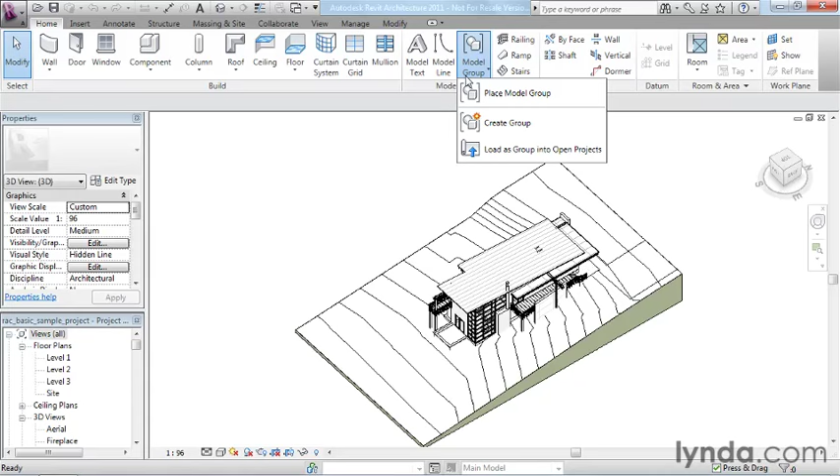The next kind of button we have is called the drop-down button. So over here on the model panel, we have our model group button, and if we click on that, it actually expands to reveal a small menu. So these are drop-down buttons, and beneath that menu we'll have several different options.

The third kind of button actually combines the previous two. So if we look at our wall tool as a good example, we'll see that the top half of the button actually is just like the door or the window tool, where you simply click on it and you'd get that function. The bottom half is a drop-down button and reveals several other wall-related tools.

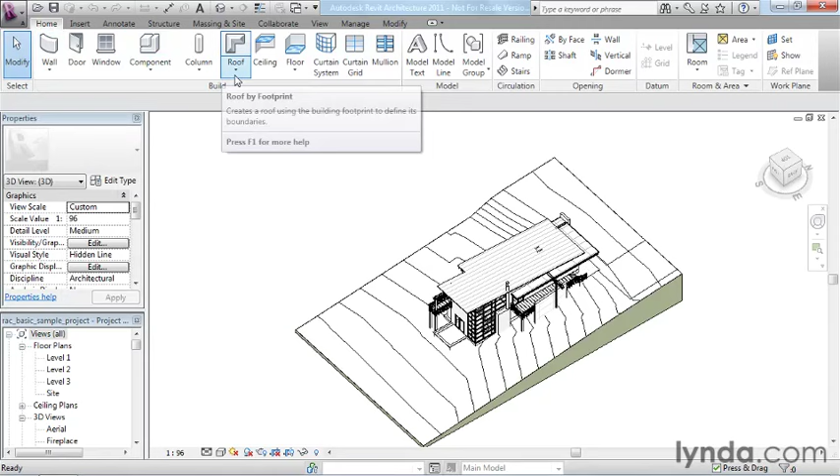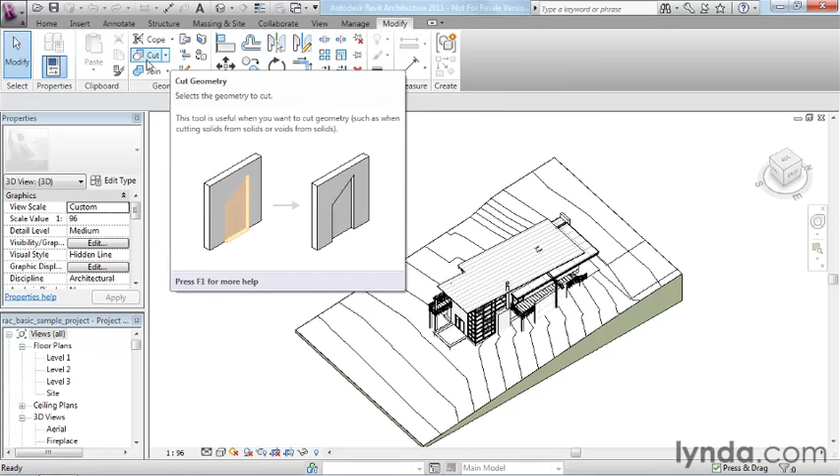You can see that across the ribbon here, there are actually several examples of the split button available to us. Most of the ones we see here on this screen are organized vertically, where we're split with the default at the top and the drop-down at the bottom. If I go over here to the modify tab, in some cases you will find a horizontally oriented split button. In this case, the default command, cut, would appear on the left, and on the right we would have our small drop-down, which reveals a few choices.

Let's look at one other aspect of the ribbon. If I click over here to the Annotate tab, we can see two unique ribbon functions: the expandable ribbon panel and the dialog launcher. Let's take a look at the expandable panel first. It highlights when you put your mouse over it, and when you click on the small drop-down arrow, it reveals a variety of hidden buttons that were maybe not as frequently used, so they're sort of stashed away under this little expanded panel.

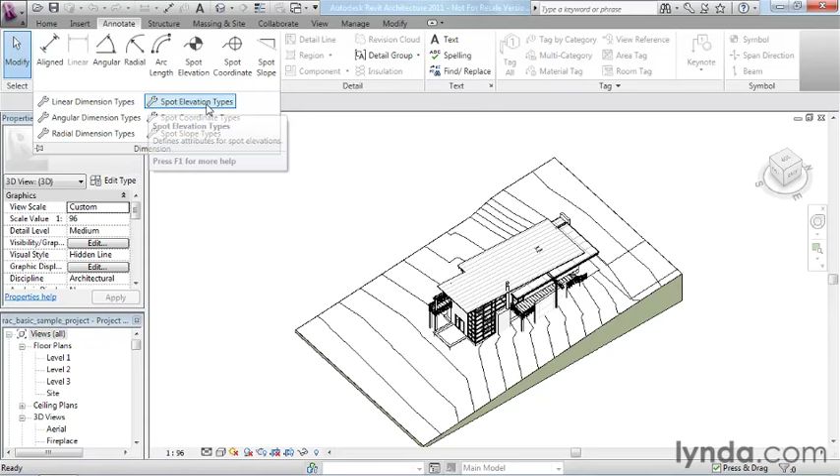But otherwise, each of these buttons functions the same as any of the others would. The dialog launcher is just another form of button. It's basically a push button, but it appears right on the panel itself, and it usually has something to do with that panel's topic. In this case, the panel was a text panel, and when I click the dialog launcher, it actually launches the text properties window. In this window, we could go ahead and make any changes we wanted to the properties of text. So I'm going to go ahead and cancel out of there.

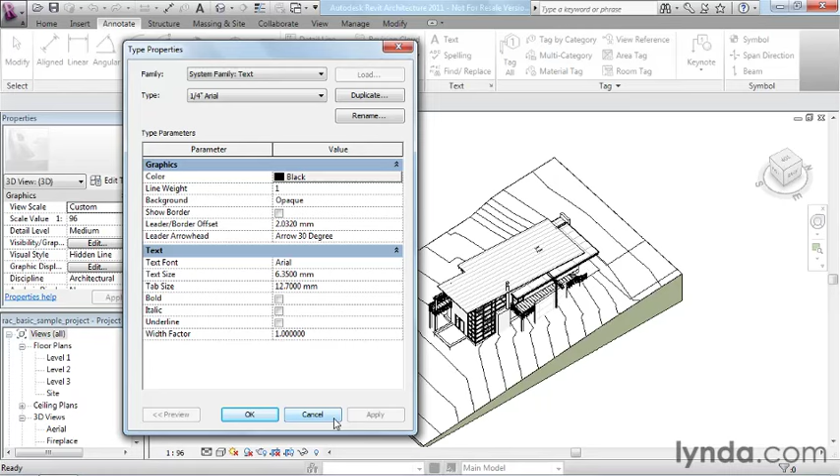The QAT, or Quick Access Toolbar, sits above the ribbon by default. We can see it here across the top of the screen, and it has many of your default commands like open, save, undo, and redo.

Way over on the right-hand side of the QAT, there's a small drop-down menu, and this allows us ways to customize the QAT. For example, one of the simplest ways to customize it is to simply add another command to it. In this case, I'll choose the new command right there off the top of the list, and that adds the new icon over at the left-hand side of the ribbon.

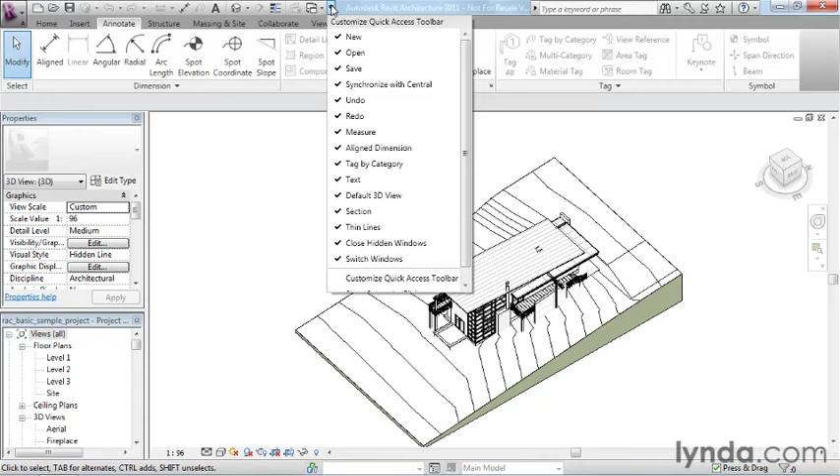Now, if I would prefer to change the order of how the tools appear on the ribbon, or add separators or any other customizations, I can go all the way down to the bottom of this drop-down and choose the Customize Quick Access Toolbar command. So I can select commands, move them up and down in the list, add and remove separators, and even remove commands from the list altogether.

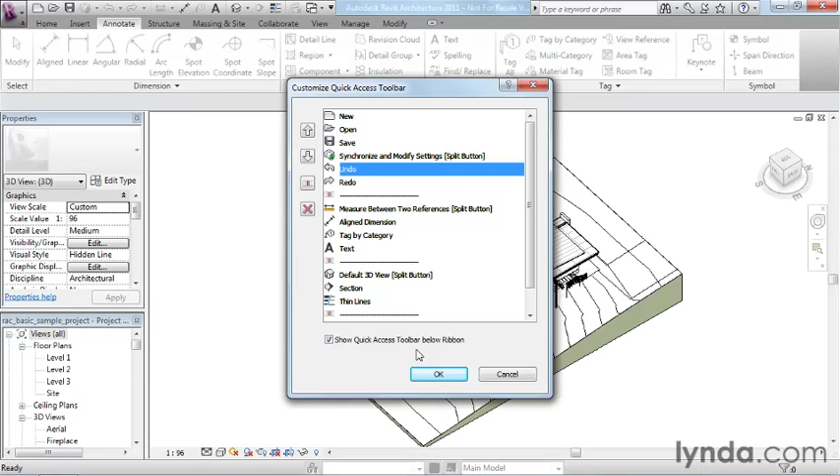At the very bottom of the dialog, we have this Show Quick Access Toolbar Below the Ribbon command. You'll want to consider doing this if you add lots of commands to your Quick Access Toolbar and begin to run out of room at the top of your screen. When you click OK, you'll see that this moves the QAT down below the ribbon and gives you a bit more space for adding commands.

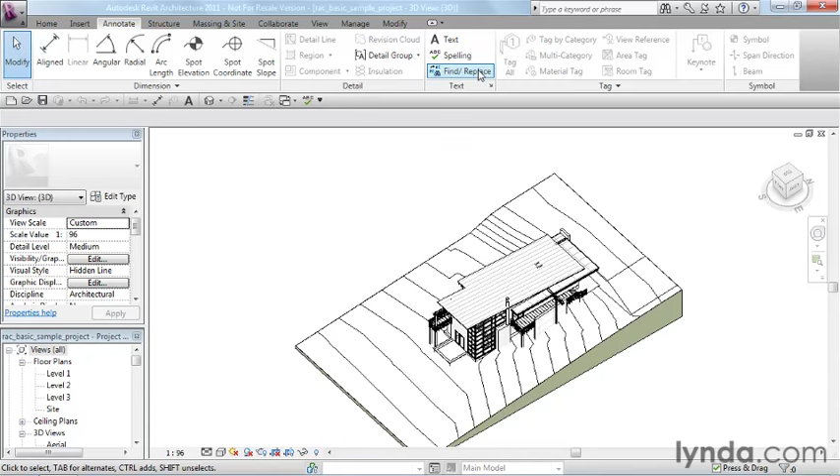Another way you can add commands to the QAT is: any command on the ribbon, you can right-click and you'll get an option that says Add to Quick Access Toolbar. So if I wanted to add the spelling command to my Quick Access Toolbar, it's as simple as choosing it there off the list.

Now what I'm going to do is go back to Customize and remove that command from my QAT. I'm going to remove the new command and put it back above the ribbon, to kind of reset us back to where we started from. Feel free to customize the QAT on your own screens, but for now I'll go ahead and leave it set to the Autodesk default.

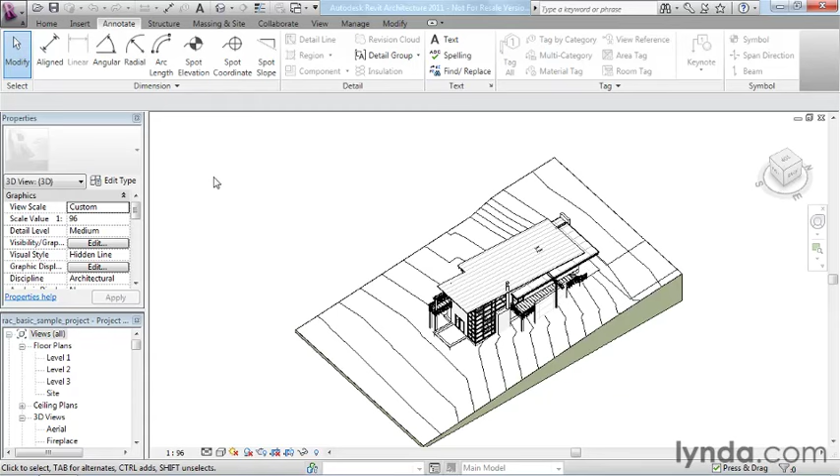So most of the tasks you perform in Revit will begin on either the ribbon or the QAT. These tools are intuitive and easy to use. Make sure you take a little bit of time to understand their functions and the nuances of their behavior to start your Revit learning experience off on the right foot.